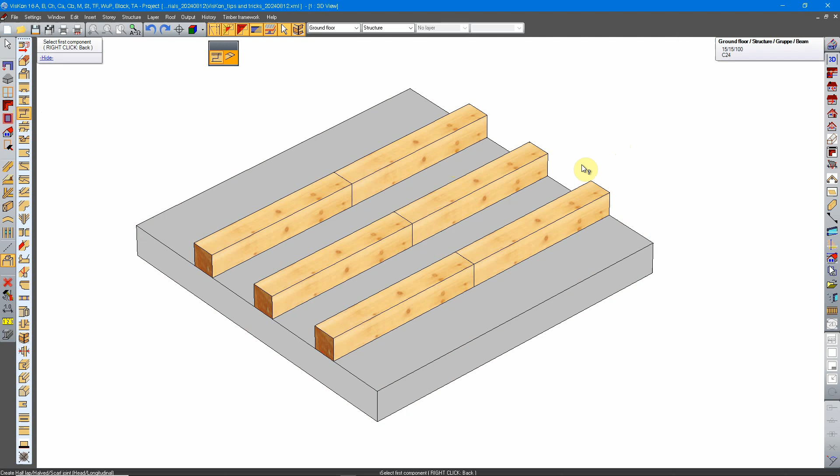Hi there. Let's talk now about VisKon's half lap joint or halved scarf joint and how you can apply this. You find this command under the frontal dovetail joint, and if you click this command, you're gonna be prompted to select two of your elements facing towards each other, of course, touching each other's end.

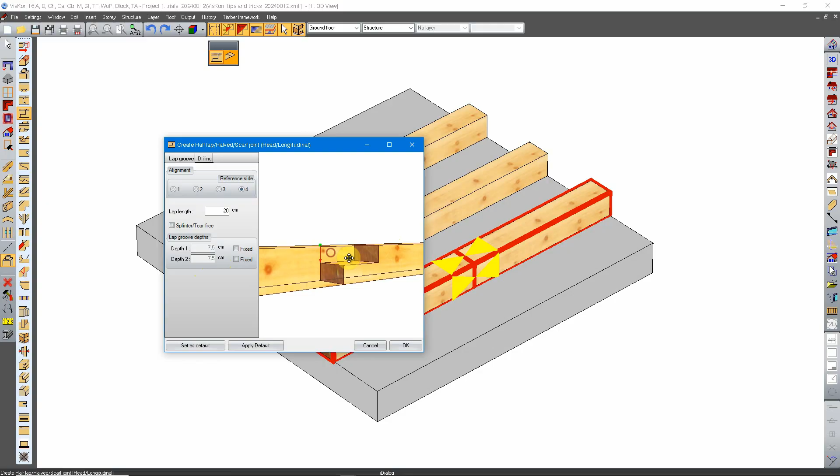And here in the window, you can select the side, reference side. You can set the lap length. How long should they be overlapping? And of course, if you don't want these two parts to be symmetrical, you can tick these checkboxes and insert new data, something like this. And now you can create something really odd. But if you tick out these boxes, now it goes back to normal.

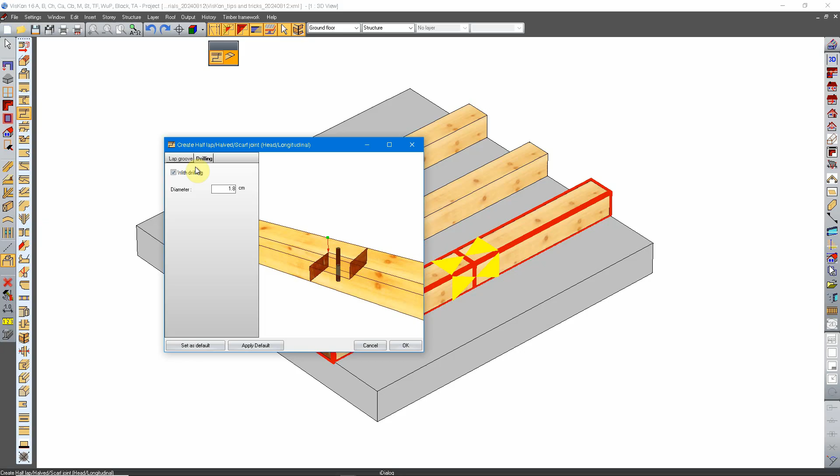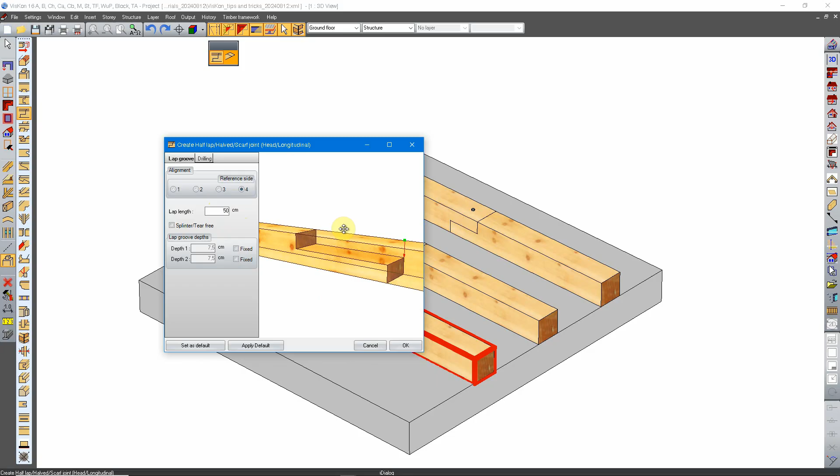You can put a drilling hole as well, and you can define how big is this hole, the diameter. And that's it. You can set it so that it's from the top to bottom as well. You can always customize it as you like with the drilling.

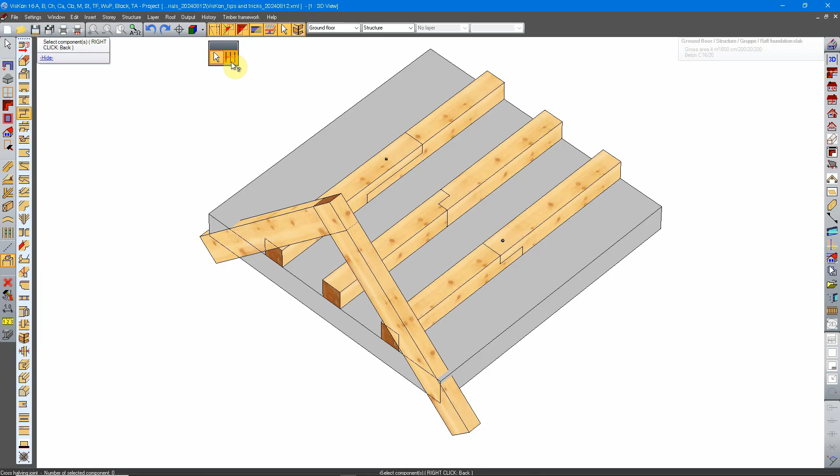Also, you can make a halved connection, a halved joint for two rafters connecting with each other on the ridge of the roof. You can make it by selecting half lap joint, selecting up here the create ridge half lap joint, and choosing two of our rafters.

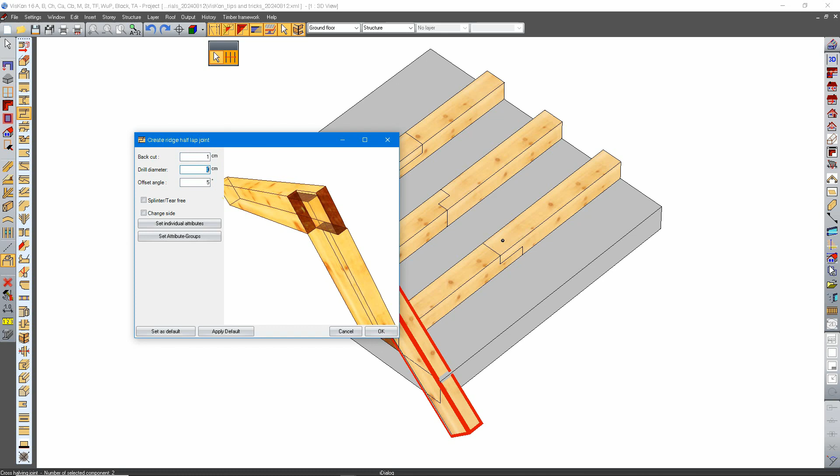And as you can see, now we have a half lap joint in the ridge. You can set the angle if you want, you can set the back cut, etc. And that is how you make a ridge connection. And here you go. This is how you can use the halved joint in VisKon 16.